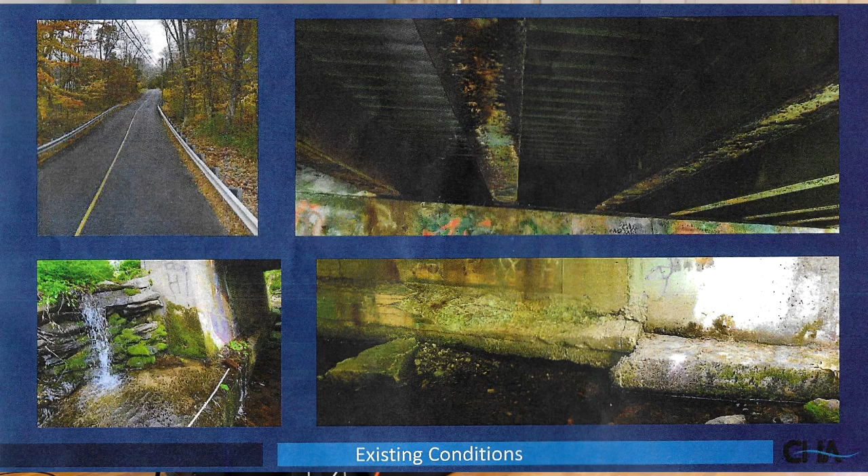The lower left photo also shows a direct discharge, a vertical drop off of a drainage swale on the north side. That's going to be included as part of this project to correct some of that.

So again, as a summary, there's essentially 4 takeaways on this project within the limits of the project, which the next slide will show. But the 4 takeaways are what's to be expected and looked at for improvements. Starting with the roadway, because that's generally speaking what everyone sees.

The profile of the road, meaning how the road dips, it's going to come up just a little bit. To be honest, you're not going to notice that at all. There's also going to be a minor increase of the roadway width at the bridge only. There's going to be an upgrade to the guide rails for safety features for any errant vehicles that may find their way off the road to keep them safe. And we're going to clean and repair the drainage swales.

As I noted earlier, the superstructure and substructure, 2 different elements of the bridge. We will be preserving, repairing, and reconstructing part of it. As part of that work, we're going to be protecting and preserving it through installing a scour countermeasure, which involves a series of rock and recreating the channel in the immediate area to allow the water to flow adequately, and staying away from the substructure, because the scour and undermining that's occurring during extreme storm events is pulling material from underneath the substructure, and over time will create instabilities and problems. So that will be addressed as part of this design.

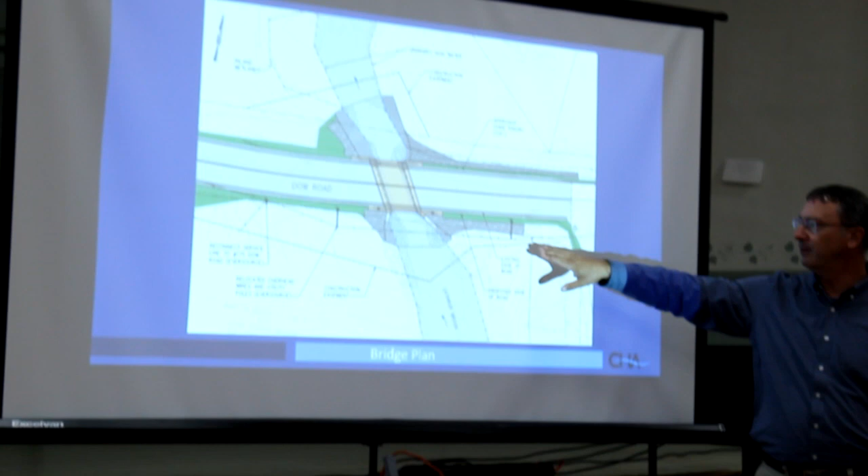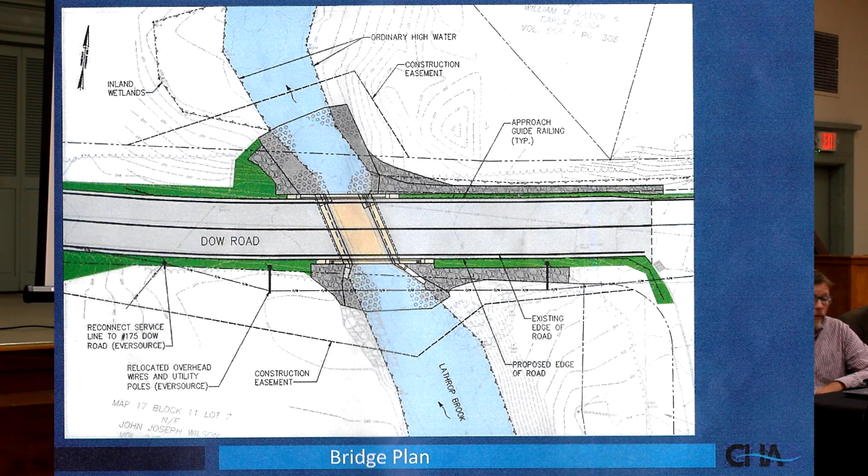A little bit of a zoomed-in view of the bridge. I want to highlight a couple things. Drainage swale, as I noted earlier, along the north, east side. There's some very steep embankments on the southeast side. The gray coloring here is showing where we're going to be armoring the embankments to stabilize the embankments. On the north side, this is what's qualifying as the drainage swale. Again, the bridge obviously is right in the middle there.

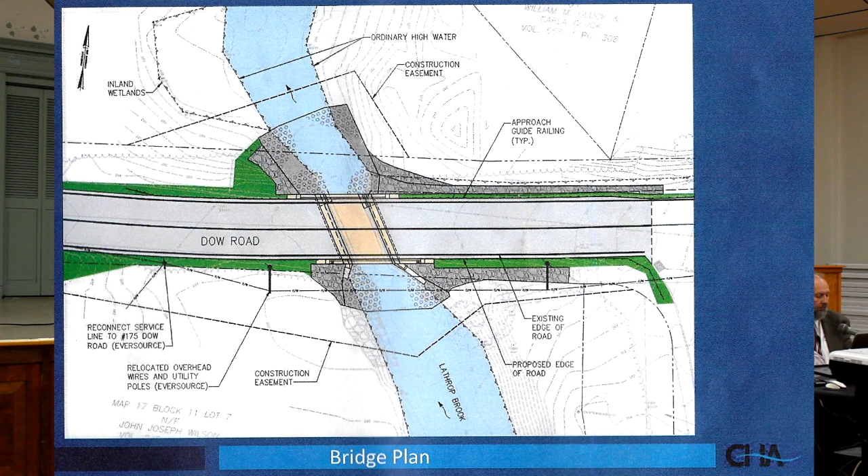The green areas are going to be what's qualified as the slope limits or the limits of disturbance, meaning the contractor, with the change of the road location and elevation, will be getting into some of that area to regrade, to clear and grub, allow for the installation of a new guide rail, as well as adjust some of the grades for the road changes.

In these graphics, I'll start with the lower left. The lower left is essentially what's out there now, and we saw the photo at the beginning of the presentation. It's essentially guide rail posts that were welded to the fascia beam and just guide rail carried through.

The top middle is the proposed structure. I won't get into all the specifics, but the plan on this bridge is to provide the most cost-effective, quickest to construct, and safest bridge that we can. So the closed road detour absolutely creates that safe environment.

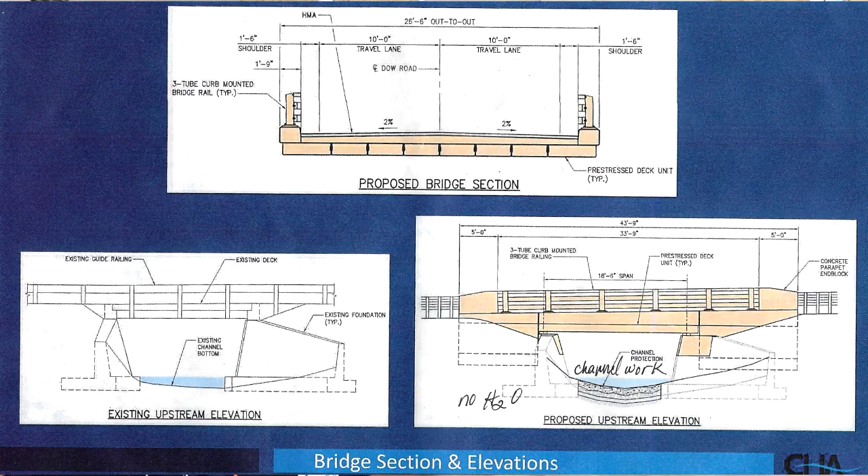The new superstructure is going to be what's called pre-stressed deck units, essentially prefabricated off-site, delivered on-site, set, and then build what's called the shear slab on top of that and pavement, which will make it constructed in a much quicker time frame than if you were to form and pour it in place.

So those are going to be fabricated ideally over the course of the winter into the spring, and when the contractor is ready for the construction, they will be delivering those to the site and setting them in one day, and we'll be ready to go. And that's as much detail at the moment as I can share, but I can get into more.

I do want to point out the channel work I was referring to earlier as well. So this is essentially some of the channel work we're anticipating. There's going to be a little bit more on these embankments, but we're going to be armoring and preventing the water from undermining and eroding during these extreme storm events that unfortunately we've been seeing more and more lately, from getting underneath the substructure. These are the substructure footings. We do not want water getting under there.

So how do we do that? We do that by installing enough stone that's sized appropriately to remain in place by their sheer weight under these extreme storm events where the flow has enough velocity to blow them downstream. We keep them in place with a series of either grouted riprap and/or various size stones.

Detour. Certainly a sensitive subject. Detours are never something that people enjoy. However, unfortunately, this project is going to move forward by replacing the bridge, which is absolutely needed based on what I've shared earlier. And a detour, again, safest, quickest, and most cost-effective, least costly, is definitely the best route to do this. Chuck, maybe you can get into some of the specifics on the detour route.